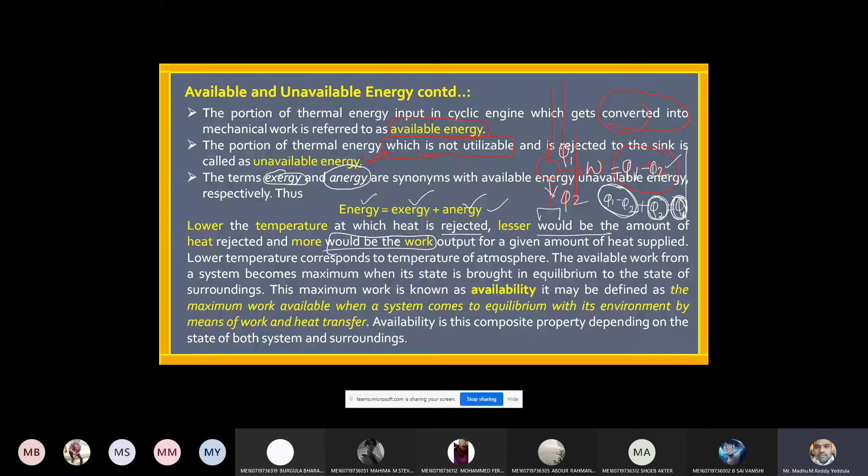At the lower temperature, the available work from the system becomes maximum. The available work from the system means what? Q1 minus Q2 is maximum when the system is brought in equilibrium to the state of the surroundings. If the heat rejection temperature T2 is almost equal to atmospheric temperature, at that time the work done by the system is maximum.

Means I can say that the system is in equilibrium with the atmosphere, or with the surroundings. If the system is in equilibrium with the surroundings, the temperature of the waste is almost equal to atmospheric temperature. At that time, the work done is the maximum.

So availability is defined as the maximum work available when the system comes to equilibrium with its environment by means of work and heat transfer. Means availability depends upon both system and surroundings. Got the clarity?

So in total I discussed four things: high grade energy, low grade energy, available energy, unavailable energy. Can anyone repeat all four definitions so that I can go to the next topic? Anyone please repeat. What is high grade energy first?

6051. 6051, are you there? Hello. Right, roll number 45. Absent. Yeah, 301. 301. 302. Can anyone hear me? Yes, sir.

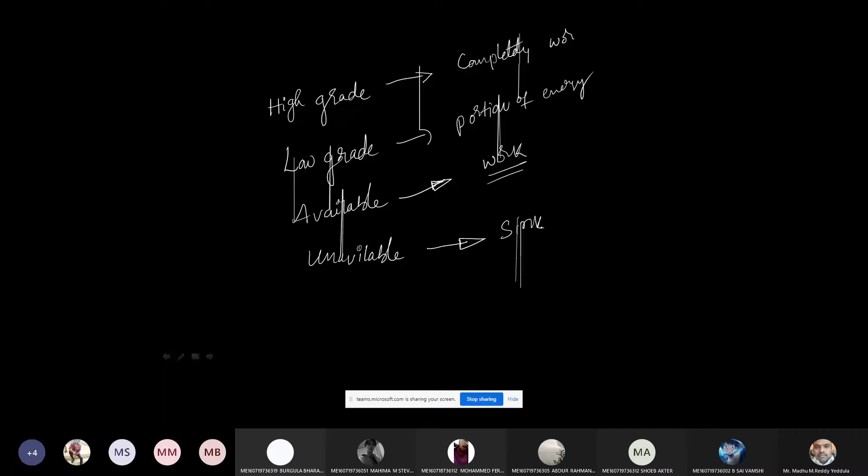Available energy means the energy that can be converted into useful work, and the energy that cannot be used for any purpose, that can only be rejected to the sink, is called unavailable energy. Now is it clear? Please answer. Sir, available energy, what is it, sir?

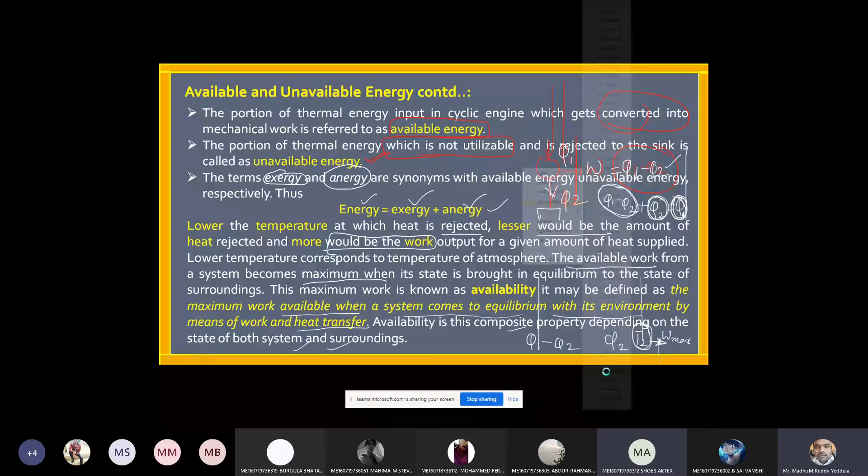Available energy is what can be converted into work. If you take a heat engine, let us say Q1 is the heat supplied. What is the work done? Work done is equal to Q1 minus Q2. So this is my available energy. Q1 is the heat supplied, Q1 minus Q2 is the work done, and Q2 is the heat rejection, right?

So Q1 is going into the engine, it is doing W and it is rejecting Q2. Out of this total energy, Q1 minus Q2 is my available energy; this energy can be converted into work. Q2 is the waste rejected to the sink. I cannot use it any further, that is unavailable. The energy that can be used is available; the energy that is rejected is unavailable. Clear?

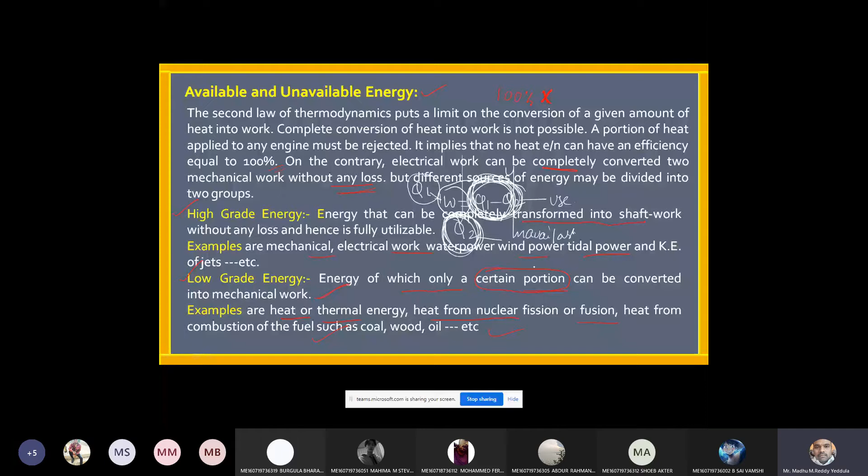Yes, sir. Clear. Right now, because only 10 students are there. If you don't get this also, it's no use. Right now, see this figure.

Right, look here. So a heat engine is taking Q amount of heat from the source, producing some W, and rejecting the remaining heat to the sink, right? As you know, ds is equal to dQ by T, or I can say Q is equal to T into ds. From entropy we know Q equals T into ds.

Now W max is equal to, let us say this is Q2 and this is Q1. So W max is equal to what? Q1 minus Q2 is the W. Now what is Q2? Q2 is the heat rejected to the sink. What is the temperature of the sink? T naught. So Q can be written as T into ds, and Q2 can be replaced by T naught into ds.

So Q1 minus T naught into ds is the energy that can be converted into work. Therefore, I can call this the available energy. And this Q2, equal to T naught into ds, I cannot use. This energy is going as waste to the sink. This energy is called unavailable energy.

The sum of available energy plus unavailable energy is called total energy. If I add Q1 minus T naught ds plus T naught ds, I'll get Q1. So the total energy is the sum of available energy plus unavailable energy. Clear now? Tell me. Yes, sir. Right, now one more last topic.

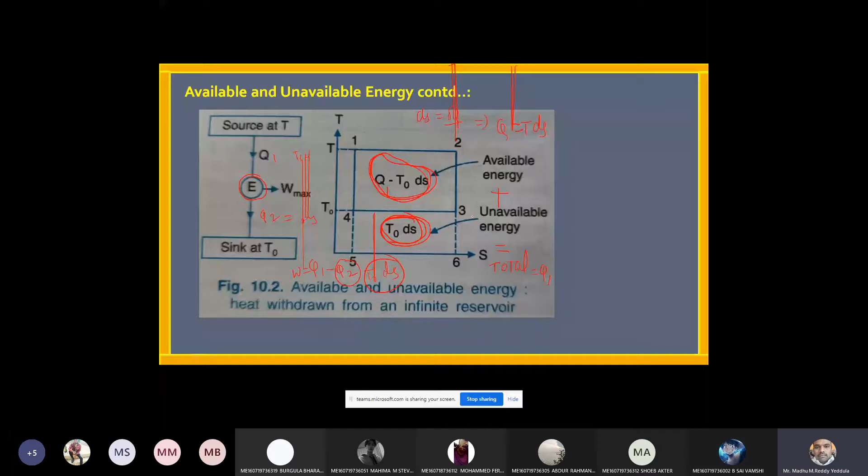Helmholtz function. Helmholtz and Gibbs functions. Important for short answer. That is also available, unavailable, and next what is high grade, low grade. Important for short answer. From today's class, you will get one short answer pakka. Helmholtz and Gibbs functions, right?

Let us consider a closed system. What is meant by closed system? Only energy interaction, no mass interaction across the boundary. Only heat can be added, heat can be rejected. Let us assume it is initially and finally at the temperature of the surrounding environment. So it is in equilibrium with the surrounding.

From first law, what can I write? dQ minus dW is equal to dU, or dQ is equal to dW plus dU. And from second law I know that dQ is equal to T into ds. So here, dQ minus dW equals dU. Again, dW is equal to dQ minus dU.

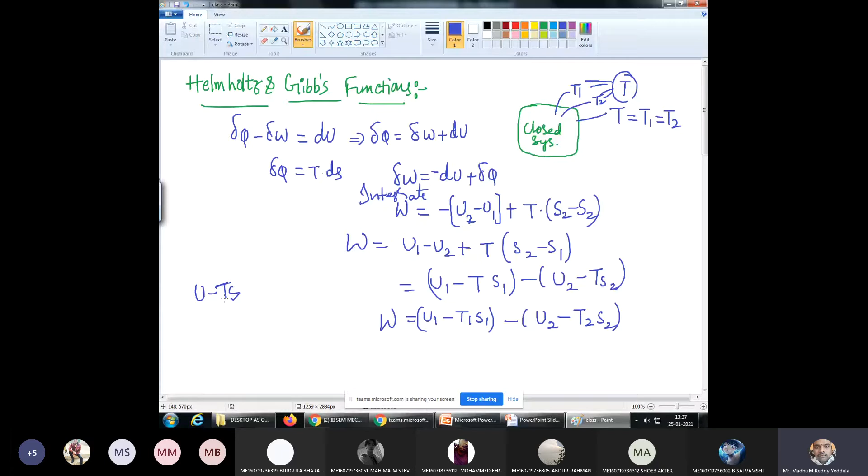The term U minus TS is called Helmholtz function. What is U minus TS? The difference between internal energy and the product of temperature and entropy. I can denote it with the symbol A. This is called Helmholtz function. So I am just using the first law and second law of thermodynamics, taking work out from the first law.

Right, directly we can write dW. So dW equal to dU, so minus dQ, or minus dU plus dQ. This one. Just integrate on both sides. W is equal to minus of U2 minus U1, where dQ can be replaced with T into dS. Integral dS is upper limit minus lower limit.

Then take two terms to one side, one term to the other side. So therefore U minus TS is a function. I can call it as A1 minus A2. So the term U minus TS is called Helmholtz function. Okay, now coming to the Gibbs function.

Now coming to the Gibbs function. What I discussed, the Helmholtz function, is basically for non-flow process, and the Gibbs function is for flow process. For flow process, there is an exchange of mass also. So Gibbs function can be applicable for open system, nothing but flow process. Open system is nothing but flow process. Closed system is nothing but non-flow process. We already studied all those things.

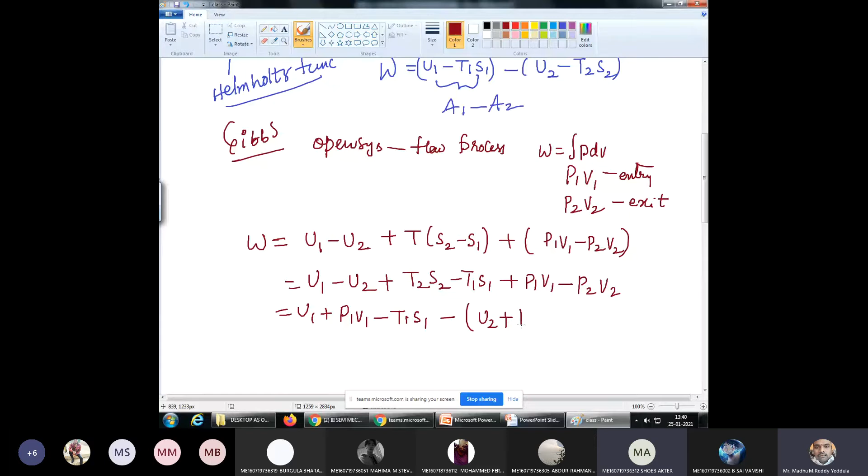So again take U1. Can anyone define what is enthalpy? What is enthalpy? Sum of internal energy and the product of pressure and volume. Yes. P2 V2 minus T2 S2. If you see, sum of internal energy and product of pressure and volume is called enthalpy at inlet H1, and this term can be replaced with enthalpy at outlet H2.

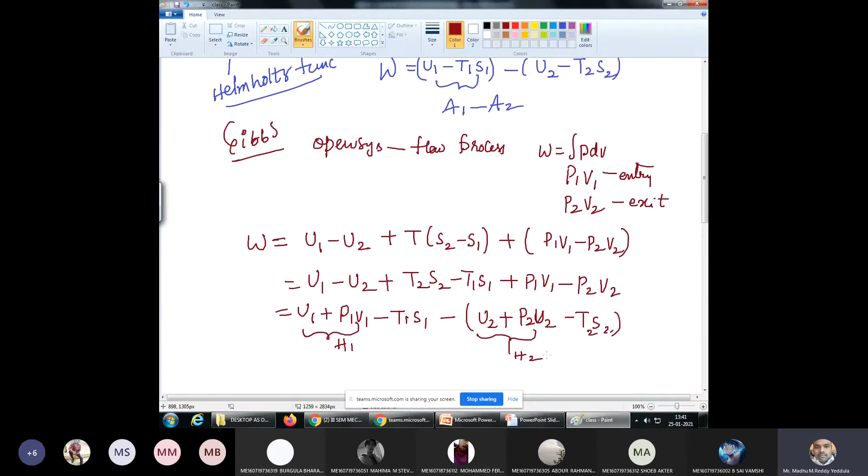So further I can write this as H1 minus T1 S1 minus H2 minus T2 S2. The term H minus TS, that is the difference of enthalpy and product of temperature and entropy, is called Gibbs function, G1 minus G2, where G is the Gibbs function. Earlier this is A1 minus A2 and this is G1 minus G2. So the term H minus TS is called Gibbs function and is defined as the difference between enthalpy and the product of temperature and entropy.

The change of Helmholtz and Gibbs function, G1 minus G2 or A1 minus A2, are called free energy, that is energy that is free to convert into work, because W is equal to the difference of these two. Therefore, the change in the Helmholtz and Gibbs functions is called free energy, the energy that can be converted into work. So remember, Helmholtz function is for non-flow process and Gibbs function is for the flow process. Compulsory question, either 2 marks or 4 marks. With this, our third unit is completed.

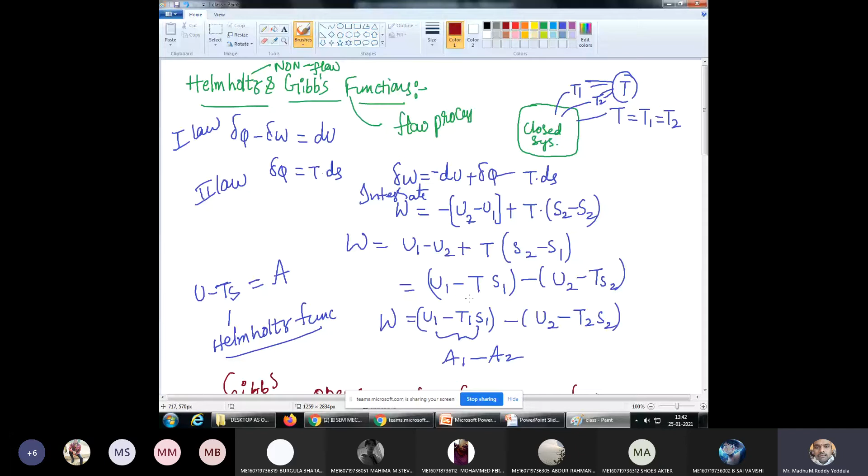Now, any doubt in these two functions? Anyone, please respond. Can't we write delta G, sir? Your voice is not clear. Sorry. Can't we write delta A or delta G? Can you repeat? No, because delta is not required here. If you want to write in terms of differential form, we can write.

Okay. Right. Yes, sir. Right. 1 second.

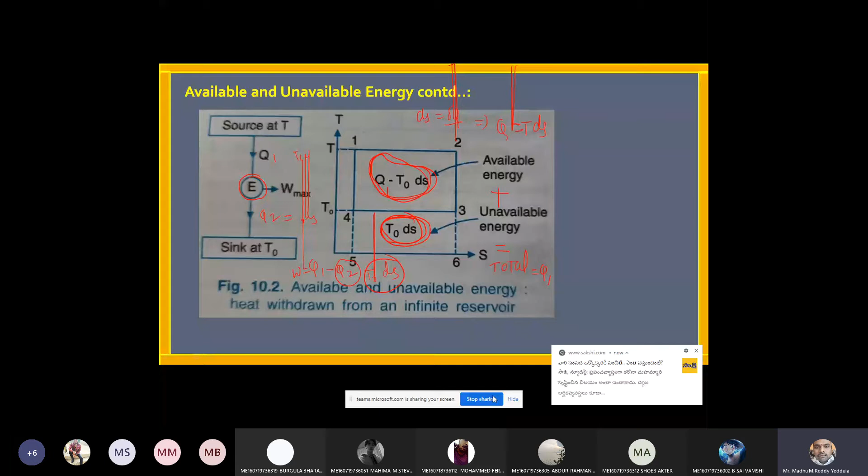Right. Can you see the syllabus? Just now I opened, it is loading. Wait. No, sir. Can you see the syllabus? No, sir. Your screen is not visible. One second. Okay. Now can you see? Yes, sir.

Right. In this we completed 1, 2, 3. So now I am starting the 5th unit, because it is very important, and the continuation you are going to study in next semester. And the 4th unit, we may start physical classes from February 1st, or maybe it depends on the government decision. Because in order to solve the 4th unit, I require steam tables and psychrometric charts. First I will complete this 5th unit, then I will come to the 4th unit. By the time, if you come to the college, well and good, or else solve problems by using charts online only. Now today I will start the 5th unit.

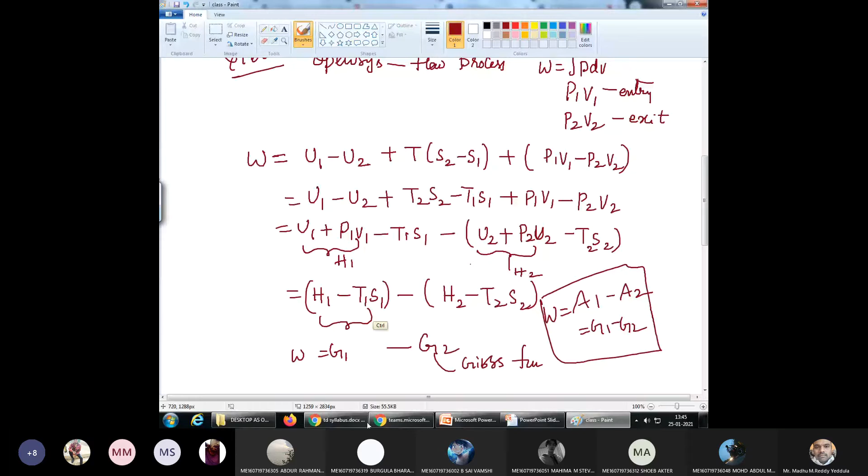Right. So now, thermodynamic cycles. Today I will explain the terminology of this one. Just now we know the heat engine, right? What is a heat engine? Heat engine is a device which converts heat energy into work energy. Agree? Yes, sir. In other way, I can define it as a device which can convert the chemical energy of the fuel into mechanical work.

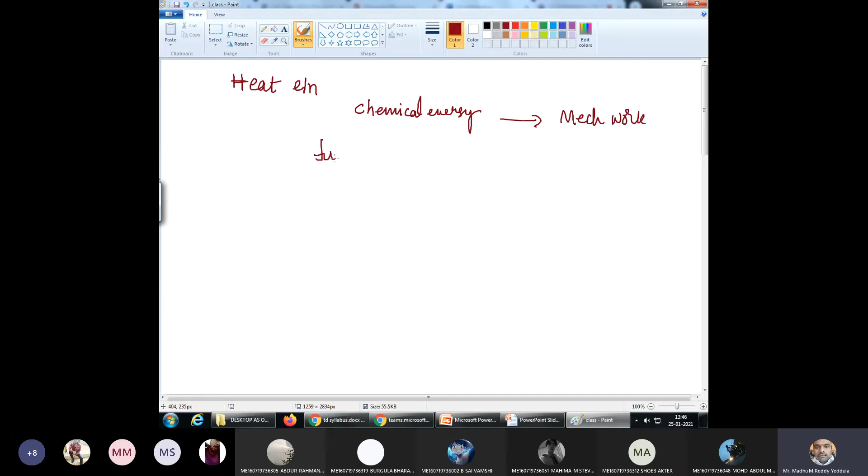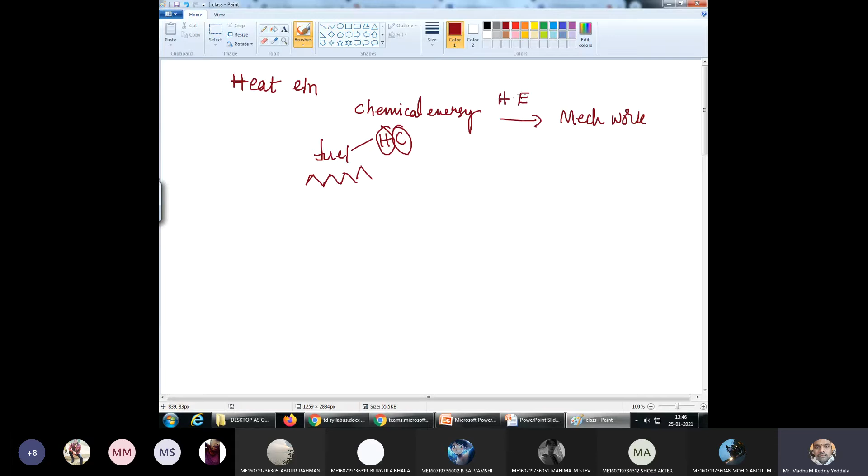How is the heat energy obtained? By burning something, then only you will get the heat energy. If you burn the fuel, which energy does the fuel consist of? Fuel will be hydrocarbons, a hydrocarbon structure. If you burn the fuel, the chemical energy is liberated, and this chemical energy is converted into mechanical energy. That is the use of the heat engine. This heat engine converts chemical energy into mechanical work.

Basically, heat engines are classified into two categories: internal combustion engine and external combustion engine. Internal combustion, the name itself indicates it. Combustion is nothing but burning of the fuel. Why do we need to burn? We require heat energy, which is liberated by burning the fuel. If we are burning the fuel inside some chamber, a closed space, a fixed volume, then I can call it an internal combustion engine. All our automobiles nowadays are internal combustion engines.

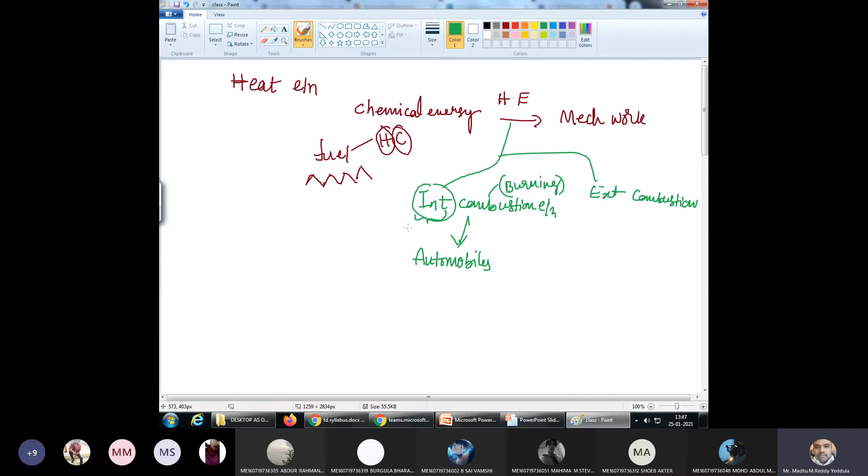Whereas coming to the external combustion engine, here we are burning somewhere outside, and the products obtained after burning, we are taking them to the place where they are required. The combustion is outside the chamber, and we are using the products of combustion to drive the engine. That is the external combustion engine. Examples are all steam engines. In olden days, locomotives were running based on steam.

So how is the steam produced? Steam is produced in the boiler. What is happening inside the boiler? Water will be there, and heat is added to the boiler. If heat is added, the water is converted into steam, and the products are used in the engine. This is my steam engine. Now the steam is going to expand in the blades of the engine, thereby you are getting the mechanical power, which is used to drive the locomotive.

Means here the combustion is taking place outside the engine, and the products of combustion we are expanding at the required position. Whereas coming to our IC engine, within the IC engine we are burning the fuel, and those combustion products we are taking to convert into mechanical work. The chemical energy of fuel is converted into heat energy, and this heat energy is used to drive the piston cylinder arrangement. Thereby you are getting the mechanical power.

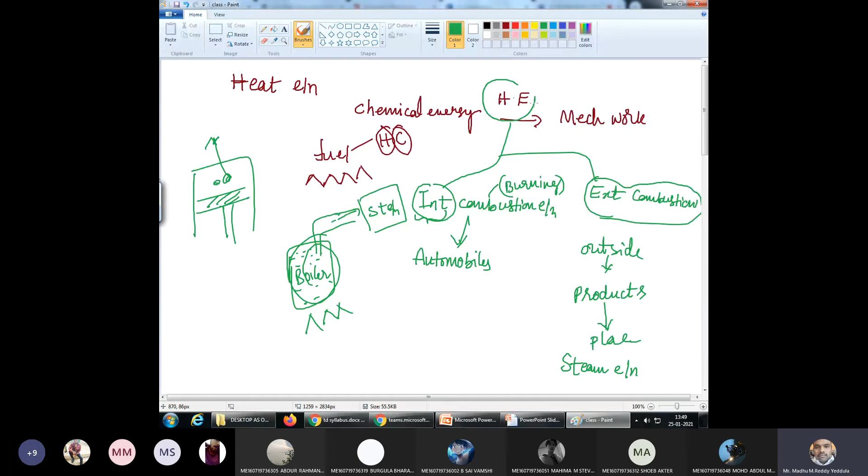Now you don't have any idea about piston cylinder, I know. I'll explain the terminology associated with the piston cylinder. Maybe I explained it at the time of the first unit; again I will repeat that. So remember, a heat engine converts chemical energy into mechanical work, and there are two categories: internal combustion and external combustion.

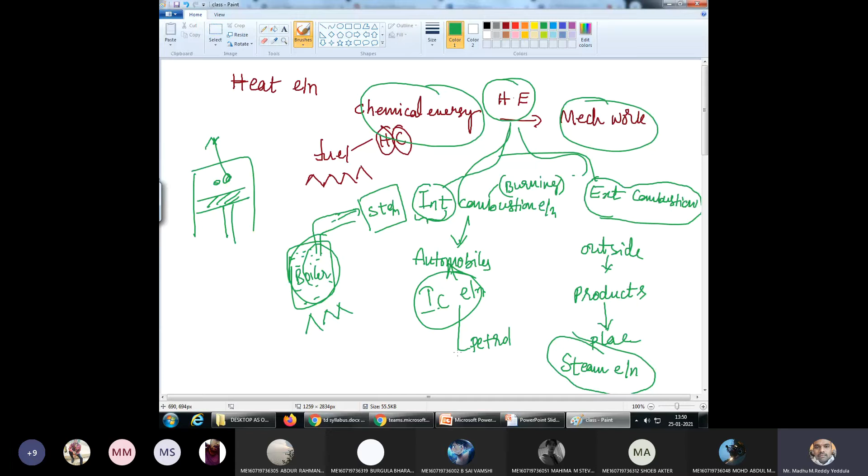All our IC engines, internal combustion engines, are nothing but our automobiles, and steam engines and steam turbines are the external combustion engines. And these IC engines are of two categories: petrol engines and diesel engines. So what is the basic difference between petrol and diesel engine? Can anyone?

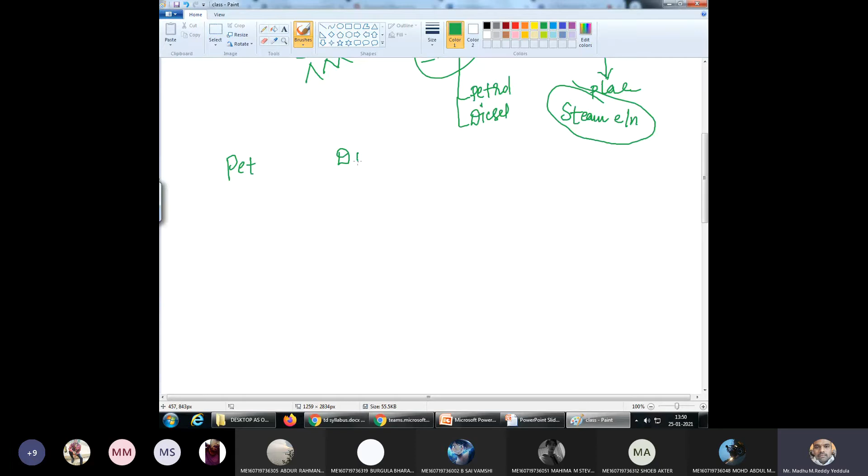So in a petrol engine, how is the burning taking place, how is the fuel going to burn? We are using a spark plug. Ignition. Sparking. Yeah, spark ignition. Petrol engines are called SI engines, spark ignition engines, whereas diesel engines are called compression ignition engines.

Okay, maybe you're diploma? Who is talking, diploma student? No, sir. Regular student. Regular, very good, very good. What about diploma? They are sleeping or what?

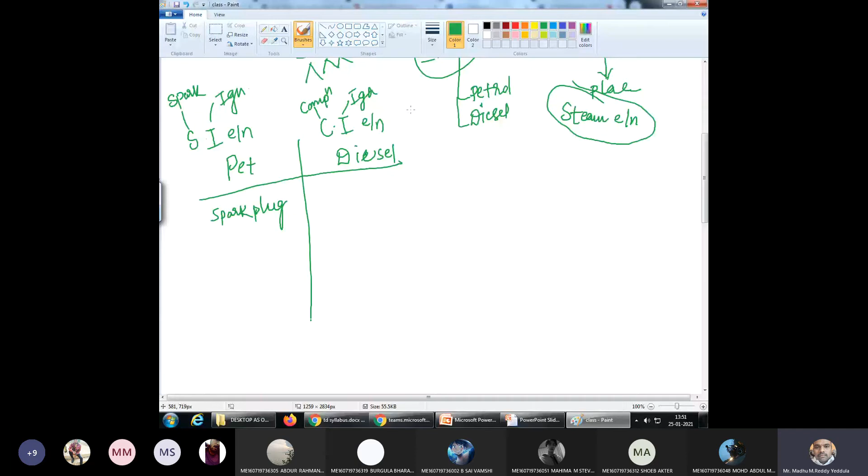Spark ignition engines, compression ignition engines. So in case of a petrol engine, a spark plug is used, therefore we call it a spark ignition engine. Whereas in a compression ignition engine, we don't have any spark plug arrangement. Here we are using compressed air, and a fuel pump or fuel injector is used to combust the fuel. Here you don't require much about the petrol and diesel engine.

If a spark plug is there, then that is a petrol engine. Nowadays fuel injectors are used in petrol engines also. In case of a diesel engine, the spark plug will not be there; in place of the spark plug, fuel injectors are used to inject the fuel. Usually in a diesel engine we are taking air initially. You don't require much.

And one more thing, remember: petrol engines work on constant volume, and diesel engines work on constant pressure. How, you'll study in detail in coming semesters. For the time being remember, constant volume engines are petrol engines: the burning of the fuel takes place by maintaining the volume constant. In diesel, we burn the fuel by maintaining the pressure constant. Now let's see the terminology.

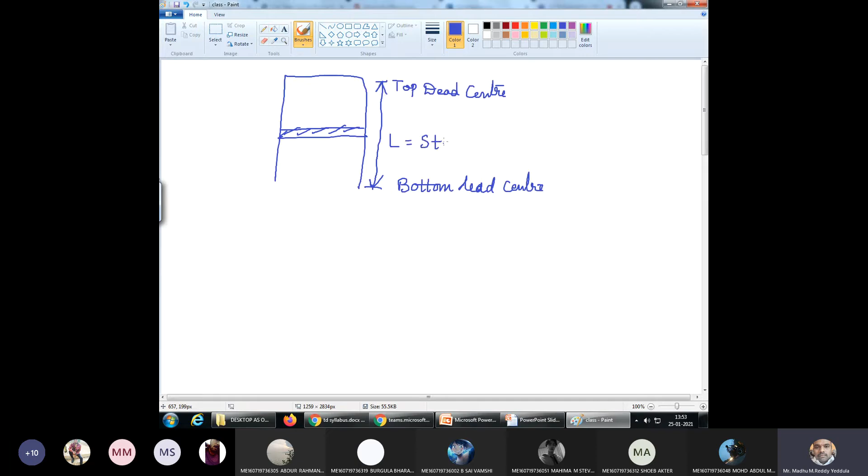What is this one? Cylinder, and this is the piston. So the terminology is, I can call this top dead center. Remember all of you, this is top dead center, and this is the bottom dead center. In between top dead center and bottom dead center, the piston can reciprocate. This length is called stroke length.

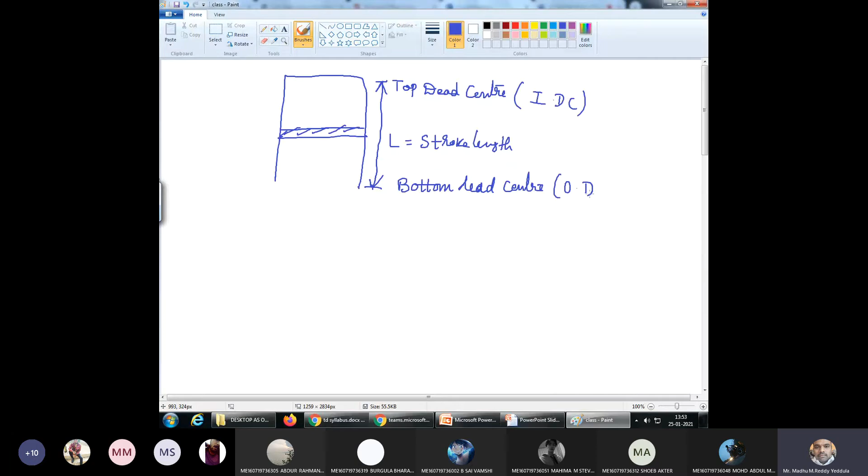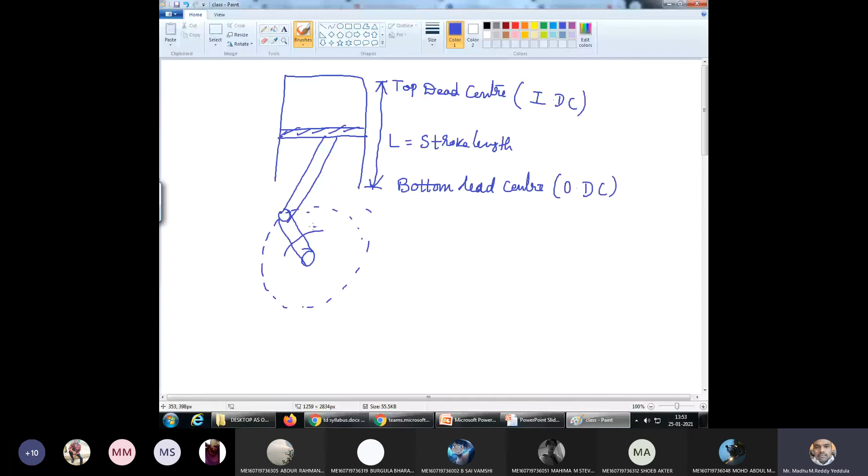So the piston can move up and down between the two centers, top dead center and bottom dead center. Top dead center is also called inner dead center, and bottom dead center is also called outer dead center. And here I have the connecting rod, and this connecting rod is connected to the crank. The crank rotates, the connecting rod oscillates like this, and the piston reciprocates inside the engine.

Hello. Now this is our engine. Inner dead center, outer dead center, top dead center or bottom dead center, and the length between top dead center and bottom dead center is called stroke length. Now when the piston is at bottom dead center, can you hear me, all of you? Yes, sir. Now at this instant of time, where is the piston? At the bottom dead center.

Now this volume is called the total volume. So let us say V1 is the total volume. Some textbooks use different notations. So V1 is equal to total volume.

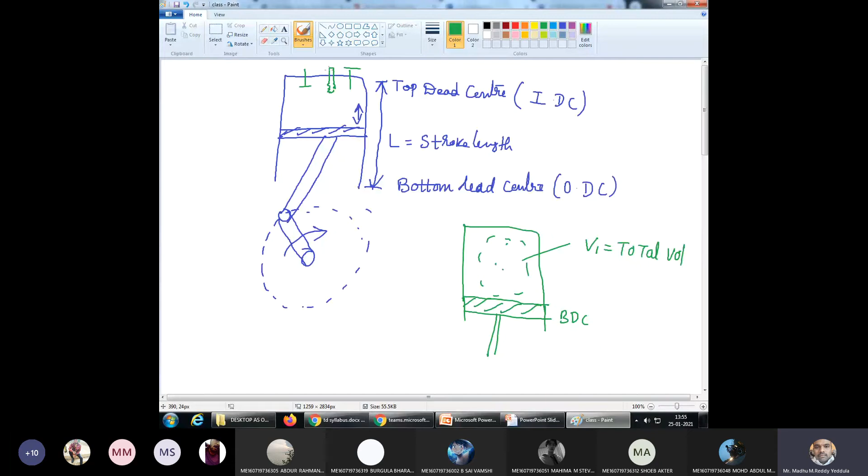Now here we have the inlet valve, here we have the outlet valve. Let us assume it is a petrol engine. Here we have the spark plug, right. So generally, theoretically, while studying, we can say the piston will move from TDC to BDC, but practically it's not possible for the piston head to touch the cylinder head. What are the reasons? Can anyone tell me? Practically the piston head will not touch the cylinder head.

Ignition, sir. When the reciprocating piston hits the cylinder wall it can damage the cylinder permanently. Yeah, that's why we maintain certain clearance. Okay, that is one reason. The question is, we won't allow the piston head to touch the cylinder head because of two reasons. One reason is the valve design. You can see the valves are projected from the cylinder head, as well as the spark plug, right? So the design of the valve does not permit the piston to touch the cylinder head.

Second reason is every stroke. Let us assume the engine speed is 1000 rpm, 1000 revolutions per minute. Per second, 1000 divided by 60. So almost 16 times the piston will reciprocate in a second. Due to this, wear and tear will be more, friction will be generated. So these are the two reasons.

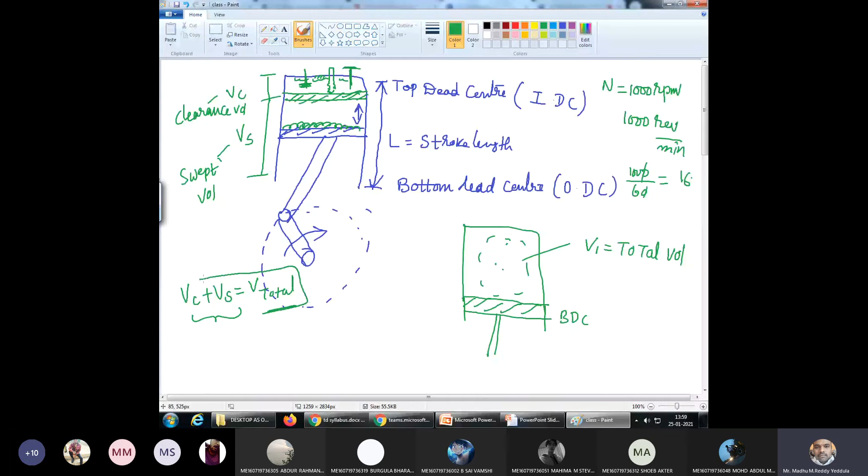Yes, sir. Okay. Mute your mic. Somebody unmute it.

Let us assume the stroke length is L, and D is the diameter of the piston or diameter of the cylinder. When the piston moves from TDC to BDC, this area is filled by the fuel. Therefore swept volume equals the volume of the cylinder, area multiplied by length, pi by 4 D square into L. Pi by 4 D square is the area, multiplied by the stroke length gives the volume of the cylinder.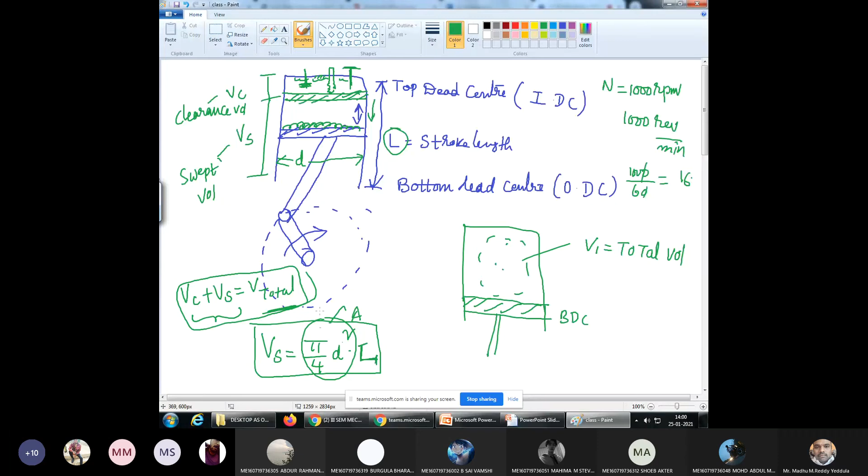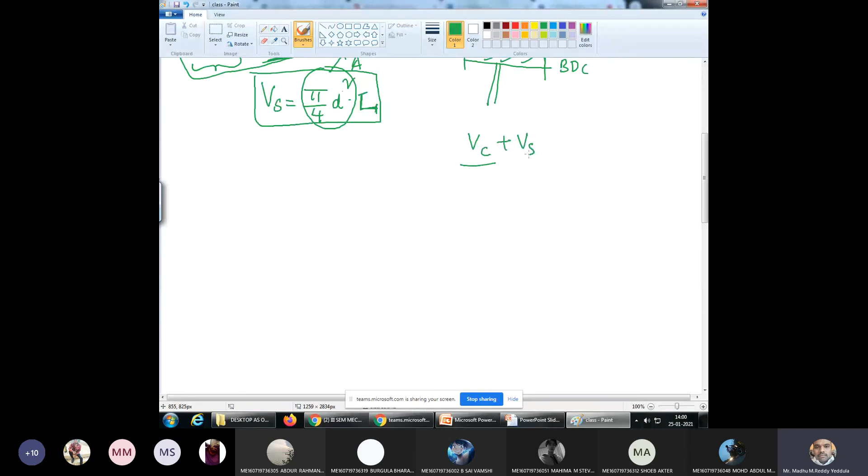Clear now? Swept volume, the volume swept by the piston moving from TDC to BDC, equals pi by 4 D square L, where D is the diameter of the cylinder or piston, both are the same, and L is the stroke length, the distance between TDC and BDC. VC is the clearance volume and VS is the swept volume. VC plus VS equals the total volume, V total. The ratio of V total to the clearance volume is called compression ratio.

Compression ratio. Compression ratio is V total by VC. V total is equal to V clearance plus V swept, by VC. That is equal to 1 plus VS by VC. Total volume to the clearance volume is called compression ratio.

Okay, and one more point here, piston speed. Piston speed is equal to the distance traveled per minute. Distance by time is called speed. The distance traveled per minute is called piston speed.